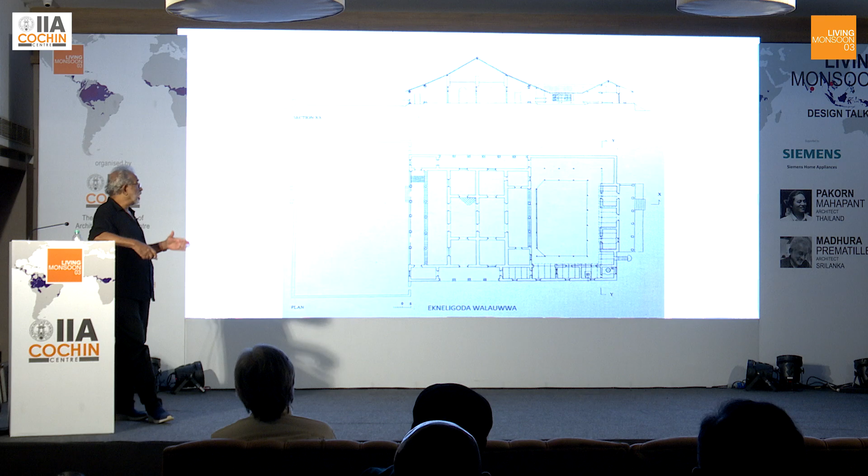It was a classic of contemporary modern tropical architecture, with its pavilion roofs and courtyards, and it draws closely from buildings in tradition. This building, called Ekneligoda Walauwwa, is an old house of the nobility, with almost an identical section and plan of pavilion, umbrella roof and courtyard. This is the Walauwwa, probably from the 17th or 18th century.

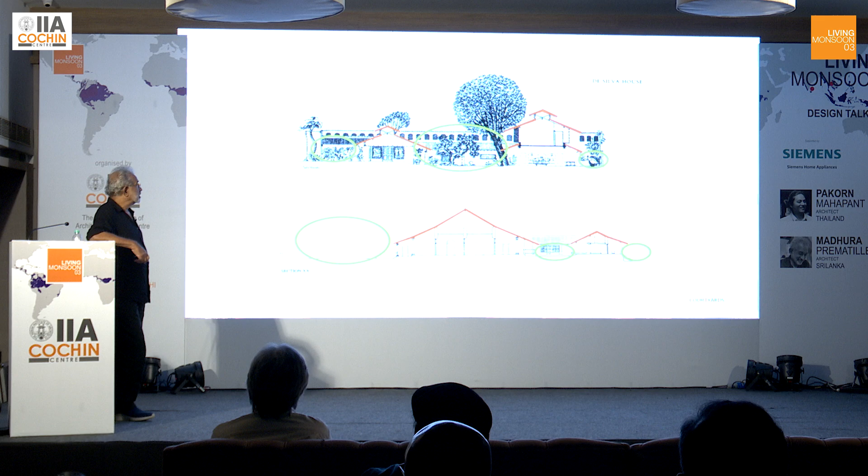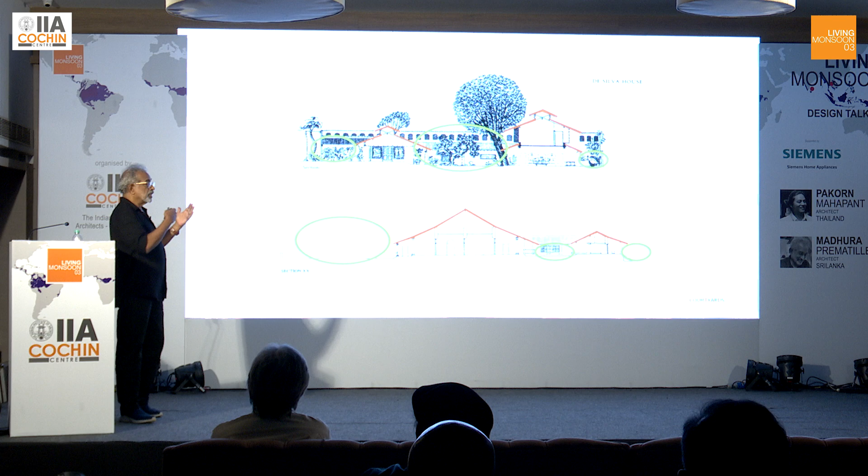This is the Ena de Silva house by Geoffrey Bawa in the 1960s. Again, the ancestor and the descendant — you can see very clearly where the inspiration flows from. The two sections show the comparison of the umbrella roofs and the courtyards, the big ones and the small ones. So the entire ethos of architecture, of climate response, of lifestyle, everything was drawn from these two elements: the umbrella roof and the courtyard.

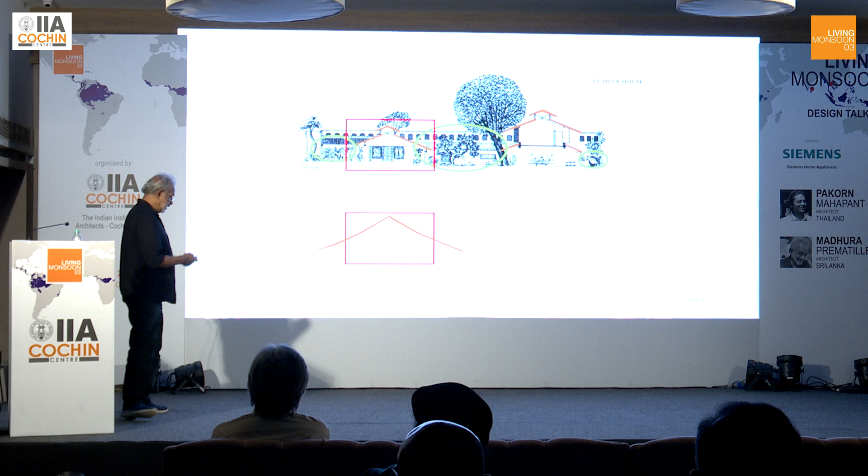When I started to practice in the 1990s, my sites were about that much — I didn't have space for this umbrella roof, because the umbrella roof must not only have space for itself, it must have visual space to flow beyond.

I had another problem — the veranda is a beautiful inside-outside space. It protects, it cools the house. But it is also, we forget, dark and damp. Most of our traditional buildings are dark and damp. And 70% of the medical problems that rural people have in Sri Lanka come from living in damp houses.

In tradition, they say that you must light a hearth inside the house for two weeks before occupation, to chase the devils away. The devil you're chasing away is the humidity.

So I found that when you introduce a veranda to a small building, which is what I was designing, the interior space became very constricted. Also, the open courtyard, which they were able to use without any doors and windows, allowed not only a little bit of rain but also rodents and animals to come in from one side and go out the other — meaning you need staff and maintenance to keep it looking as good as it does in this picture. My clients didn't have any of that, so I had to look elsewhere for inspiration.

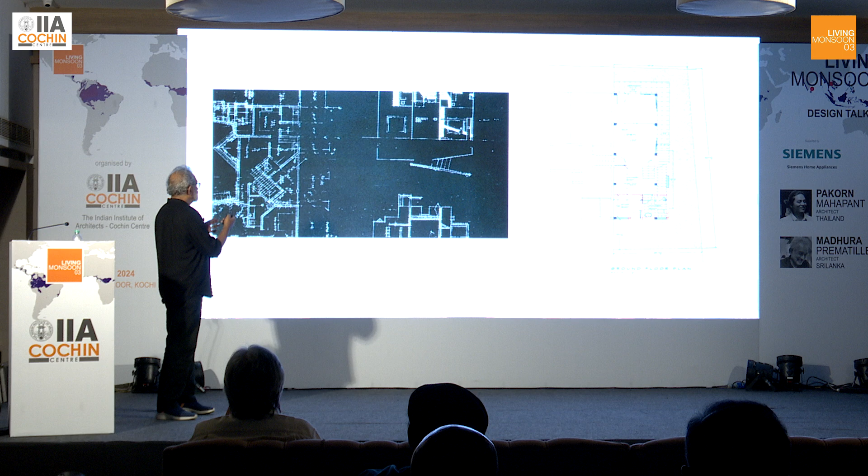So my work was beyond the umbrella and beyond the courtyard. In early work, I struggled with the idea of building compact spaces, small spaces which had to deal with the climate, the brief, and small sites.

The first time I really found a direction to move was in this building called the Longhouse, which was built in 2002. It was a long, narrow site.

I had begun to practice certain ideas in smaller sites, but in this longer, bigger site, I was able to express these ideas more clearly. The idea of a linear building, which does not need to rely on the umbrella and does not use the courtyard, but the linearity of the garden.

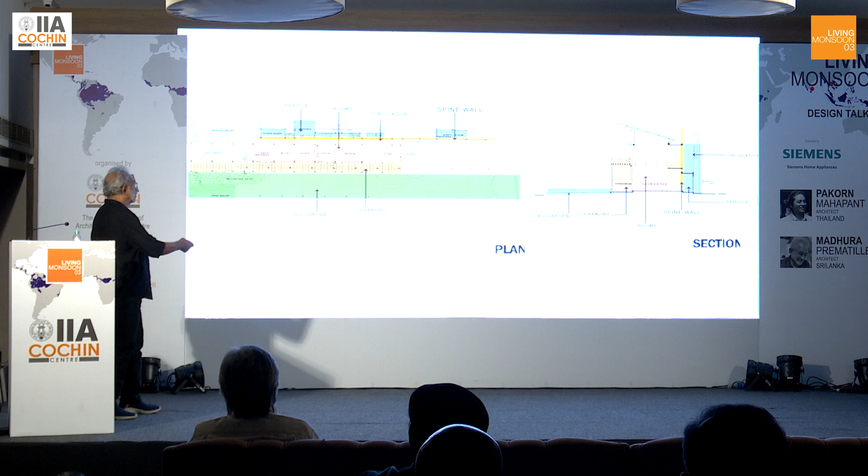So we have in this several linear elements. There's a linear wall which runs through the whole building, which separates the service and the served elements. The yellow is circulation, the orange are all the rooms, and the brown is a veranda. Then it ends in the long garden, which is the green, which you also see in the section.

So the roof is present, but it's hovering above. It does not come down. Raising the roof off and facing it in the right direction allows the light to come in.

My response to the veranda was to create a space which also had light. It protected, but it also allowed the light in. So we have here pergolas, wooden pergolas, bamboo tats, and glass or polycarbonate over there, so that it screens the light, but it allows the light in and creates the shadow pattern throughout.

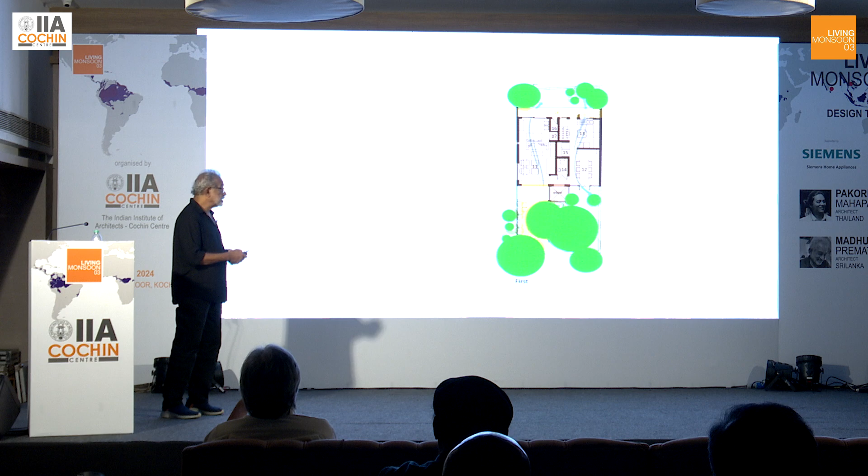First of all, it's a very small plot. This is the smallest legal plot size allowed in Sri Lanka, which is about 150 square meters. The footprint is less than half the site, and the building is thin and tall, and it's single bank, so it allows the air to pass through.

The staircase is more than just a means of going from one floor to the other. It's single flight, so that it opens on each side to the east and west. So you get the sun bouncing off the steps at different times of the day.

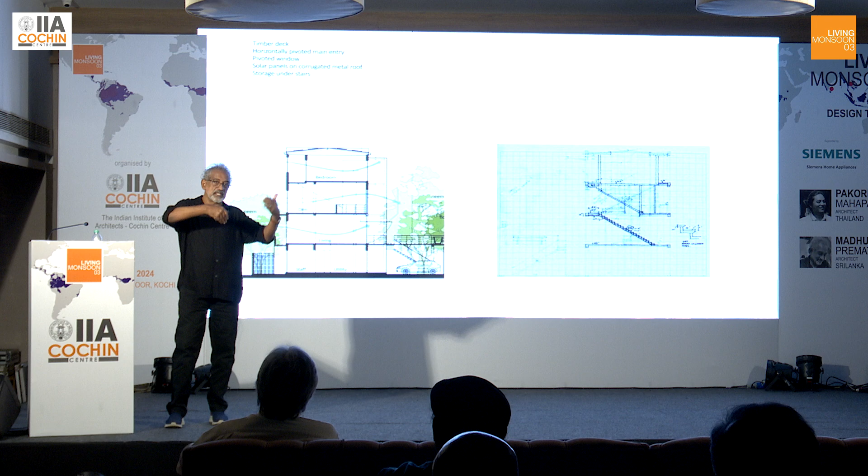This was the house. We had some existing trees on the site which we built around. This is what it looks like now. So if we order pizza, they deliver it next door, because nobody lives in the jungle. These neem trees which were there on the site are probably 50 years old. We built around it.

The main living space is on the upper level, so that the ground level is freed for mundane things like parking, and now my studio, my office itself resides there.

This way of relating to this deck is very important, because it extends the living space outside. It's a pivoted, counterweighted screen which opens up to connect the inside and the outside. When it's open, it becomes a canopy, both for the sun and the rain. And when it comes down, it becomes a screen which certainly frustrates the mosquitoes from getting in.

The rooms are fairly narrow, 2.7 meters, 9 feet wide, which is my idea of how to build small and consume less.

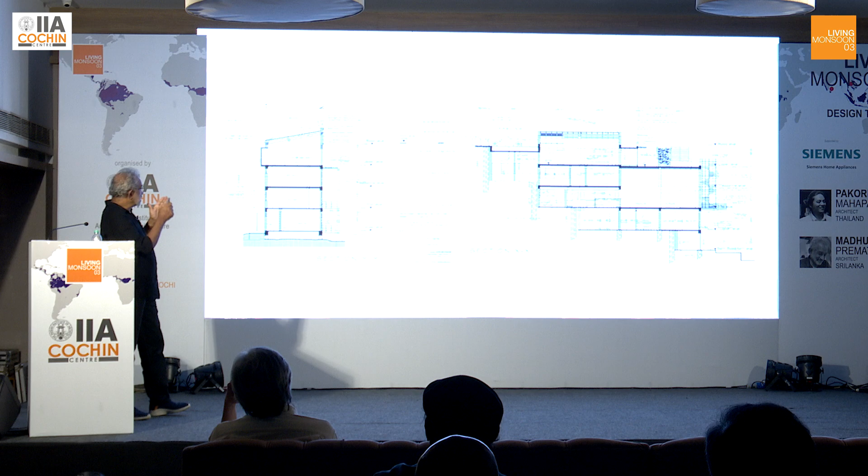This house uses some of the same ideas, again the idea of building on very little of the site. It's on a very large plot, but the buildable area is that much. But we chose to build on less than half of the buildable area, so that the house is a very thin sliver which steps down six levels, so that it steps down the hill and the contours.

So at the entrance, you barely know that there is a house, because the rest of it goes down, and then it begins to emerge from the landscape.

This idea of building very close to the trees, to the big trees, is something that I learned from the late Lucky Senanayake, who was this wonderful landscape designer and artist. So if you build very close to the trees, you will have the advantage of the screening, and you also don't have the problem of the tree blocking your view. So the tree basically frames the view, while you have the advantage of the protection.

And then the houses, we have all these screens, and I'm an unabashed user of glass, because I believe there is a way to use the glass in the tropics by screening it out, by adding these balconies and pergolas and various elements which will protect and help to use the indoor-outdoor space.

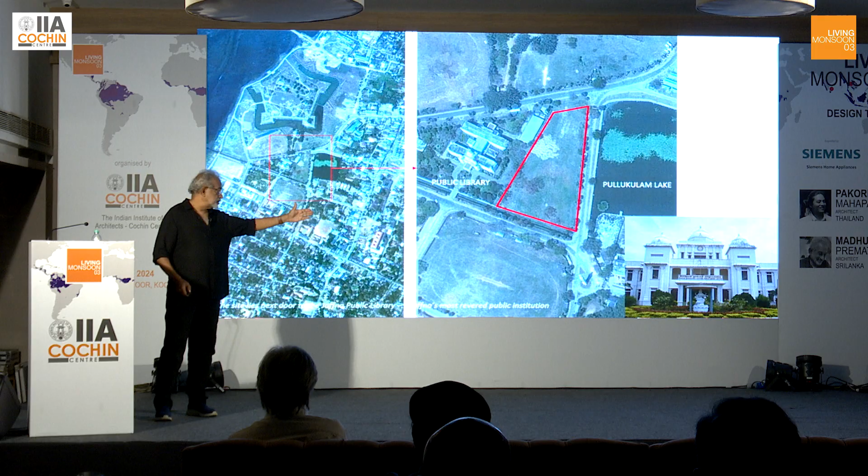The site is located in a very important place, next to this building, which is the Jaffna Public Library, Jaffna's most revered public institution, because the people of Jaffna have very great respect for education and knowledge. So this public library is treated like a temple, and people take their shoes off when they enter it.

So our site was located right next to it. The primary response had to be defined by building next to this much smaller but much more important cultural icon. So our first gesture was...

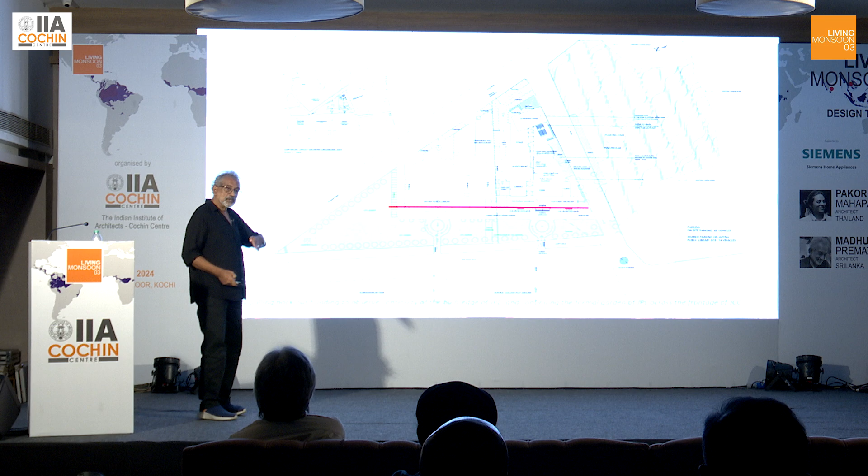This is our site here, it comes right up to here, and this is the public library next to it. So our first gesture was to pull back our building up to the facade, the front of the public library, and then to extend the garden of the public library right across our front. Basically, we were pulling ourselves back to fall in line with the public library.

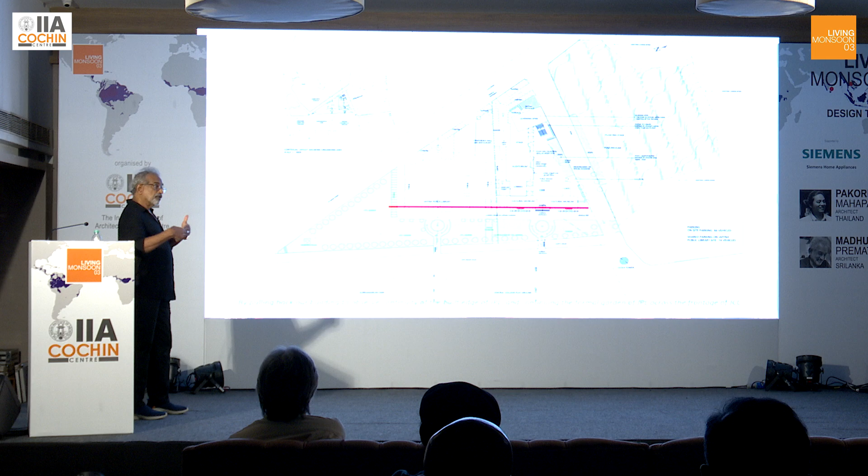And then we introduced this facade, this colonnade, which observes the scale, the rhythm, and the material of the library. It doesn't observe the same details, but it observes scale and rhythm, so that when you stand here at the entrance, it appears like the public library is extended across the front of our building. You do not see our building.

This is the formal entrance to the building. You see it like an extension of the library. These are the two front edges for comparison. So the idea was to be secondary in that position to the library.

The design was selected via competition, which was conducted by the High Commission of India and the Sri Lanka Institute of Architects. And what we tried to do was create a contemporary building, but which was inspired by the traditions of the region.

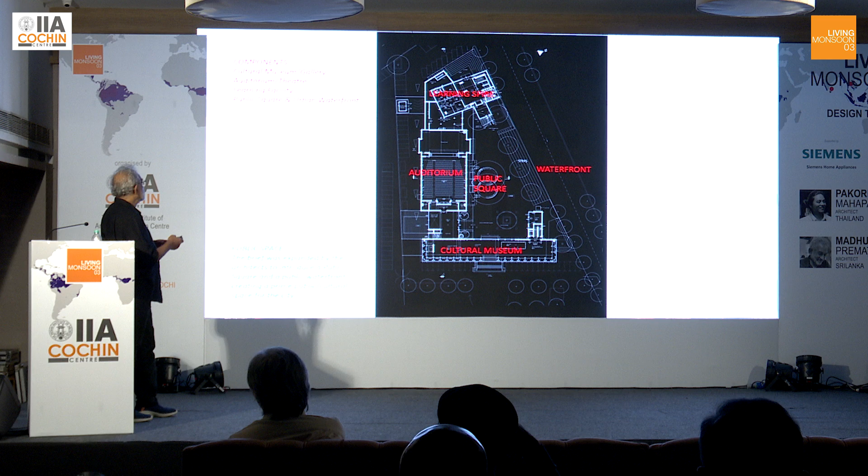There are 3 built elements in it: a cultural museum, auditorium, and a learning spire, all arranged around a public square and next to this waterfront. This public square was not part of the brief - it's something we introduced to create a public gathering space, because it's a public building and we felt that without a public open space it had no relevance. The base is on 3 levels and then there's a spire which goes up, as I will explain.

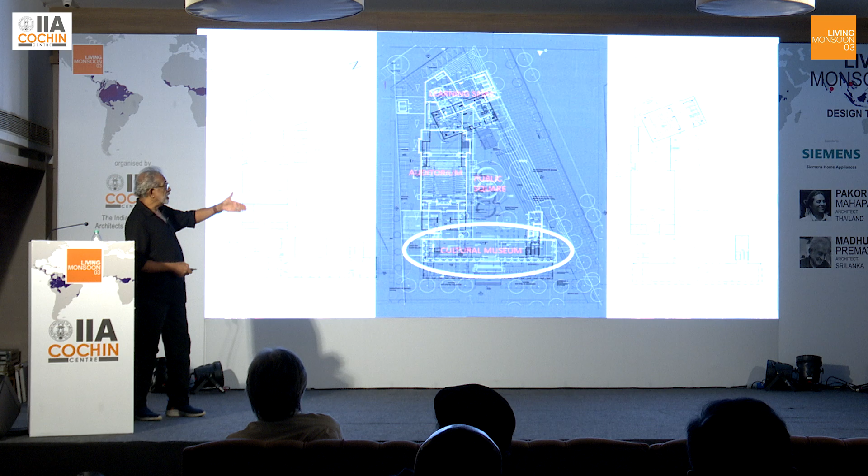The first building is the Cultural Museum, which is what you see here, and it is the formal entry to the building. This is the colonnade - you can see the presence of the building next door being extended across. So our building is behind this facade and it rises up behind it, which is a completely different material: steel and glass. The colonnade is white masonry.

And the two are separate. There's a physical gap which separates the two. So it is very clear that we are wearing a respectful garb in the presence of the respected building next door.

This forms the formal entry and it is also a public exhibition space, and it opens to the courtyard, the public square at the back. It has 3 levels with open exhibition spaces and an enclosed museum on top, and it is topped by a dome, which is an echo of the dome of the public library next door.

And under this dome is the main exhibition space of the museum. So the actual character of this building is only revealed on the inside. When you see it from the public square on the inside, that's when you see this building as it is, with its timber screen and its dome. Until then, it was hiding behind the colonnade.

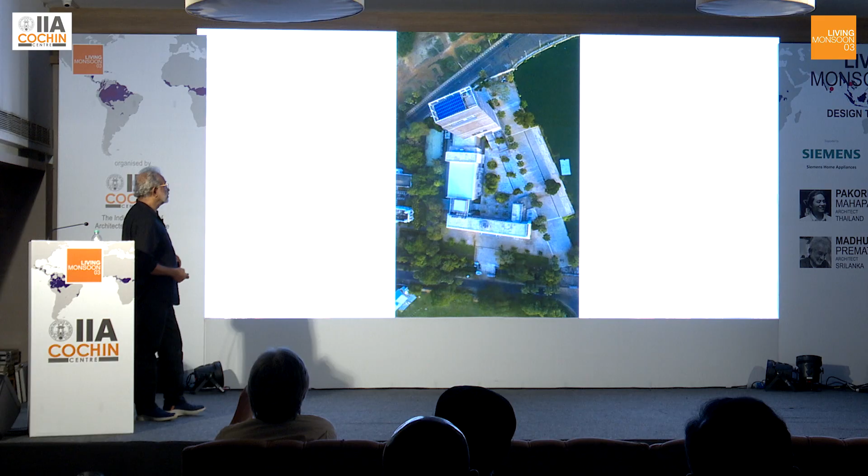The public entries come through this, and then entries from the public square into each of these. This public square, this particular location, is remembered. It has a very strong place in the memory of Jaffna because there was an open air theatre, a small amphitheatre here before the war, where they would hold classical music concerts very often, and it was a part of the memory of the city. So we wanted to create a public activity space in that very same spot.

We planted 100 neem trees to create shade because it's a harsh climate during the summer months. And on the blank wall of the auditorium, we introduced this art wall, the idea being that artists could display their art and people could walk up these platforms and engage with them.

And the square then steps down to form an amphitheatre, a performance space, which is first on the street here, and then it steps down to the lake where there is a floating stage.

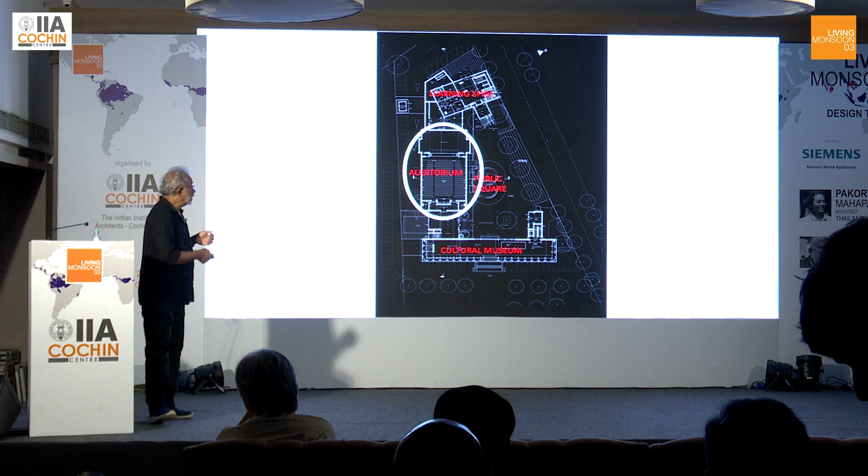The auditorium is a 600 plus seat facility. It has a limited depth because it's designed specifically for a type of performance where you need to see the facial expression of the performer, like Bharatanatyam. So it's a 23-meter depth, but wider.

And the acoustic walls of the auditorium carry a special motif, which is the pattern of the Palmyra leaf fence, the most frequently seen, most well-known urban feature of Jaffna. So when you sit there for a while, this pattern slowly begins to become evident.

The building was designed to contain learning facilities for the arts - studios, conference spaces, teaching spaces, and so forth.

The idea being that if there was one building which was going to be prominent here, it should relate to the same ideas as the public library, the idea of education and knowledge. So there is the old icon, which is the public library, and the new symbol, which is also to do with learning - therefore, the learning tower.

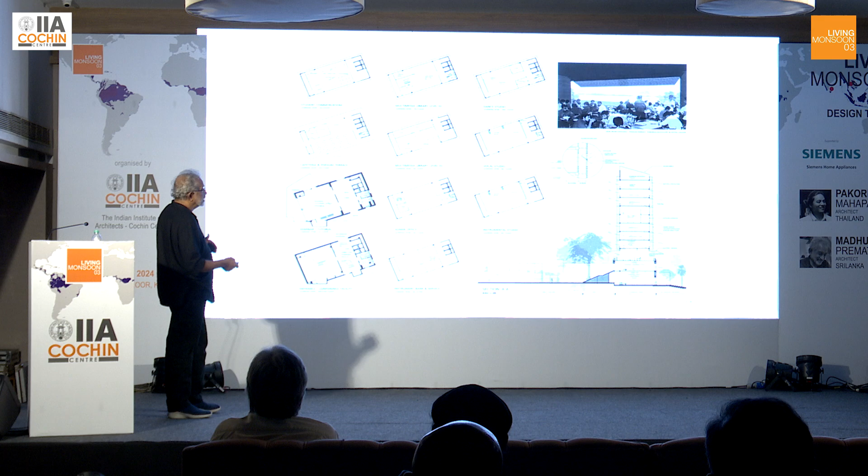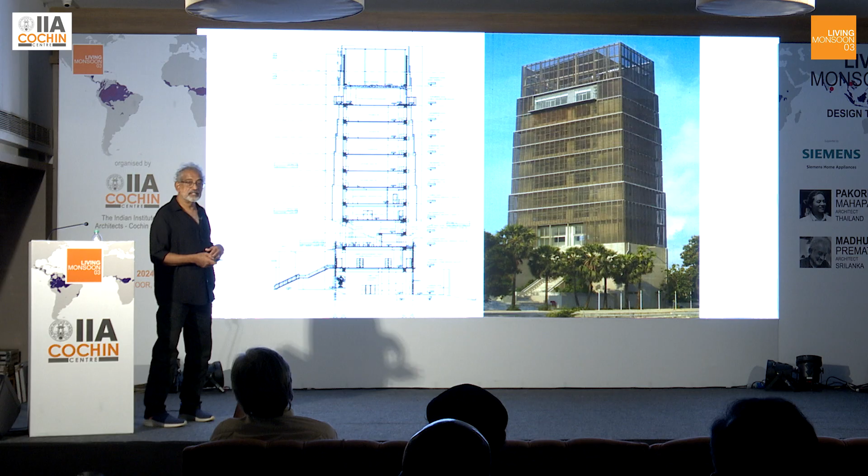A base level of 3 floors, and then about 7 or 8 floors above that. The floors are open on their longer sides, so that it allows the sea breeze to pass through. The building on more than 7 floors is completely naturally ventilated, and it is wrapped around by this timber screen, which screens the sun, allows the breeze to pass through, and creates these patterns which move across each floor.

And of course it allows the views also. As a result of the screen, these solar panels on top of the roof can be used for 70% of the power requirement of this building, because it makes maximum use of natural light and ventilation.

The screen itself was made of 3 meter by 3 meter panels, so that it could be fitted from inside. So there was no scaffolding required to erect this on 13 floors. Each one was fitted as a 3 meter panel from inside, and if it is necessary to repair or replace it, it can be done the same way.

The inspiration for this tower, for this building, we have drawn from the Hindu architecture of the region. For example, the learning tower is influenced by the idea of the Gopura. The entrance steps to the learning tower are derived from the idea of the Ther Murtipadi, the chariot house steps.